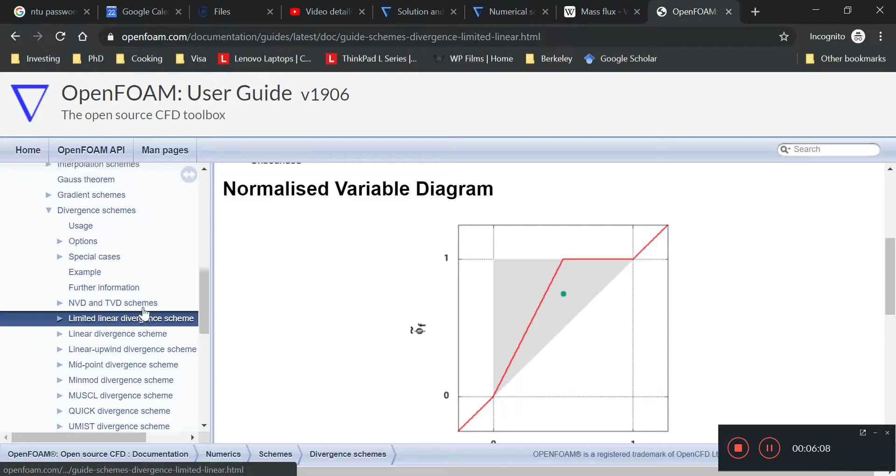Okay, so if we look at the upwind scheme, upwind divergence scheme, this is what the scheme looks like. Alright, so we can change all to some sort of a Gauss linear kind of scheme, which is what we want.

Okay, so this is Gauss linear. We'll go for Gauss linear for all of them. I'm gonna do linear for all of them. So Gauss linear.

Better make sure the syntax is right. So I'm going to fast forward this. Now basically I changed every one of the schemes to a Gauss linear scheme. Okay, this one I need to correct. Insert and press R, and WQ. Alright, so we can move on to the FV schemes, FV solution.

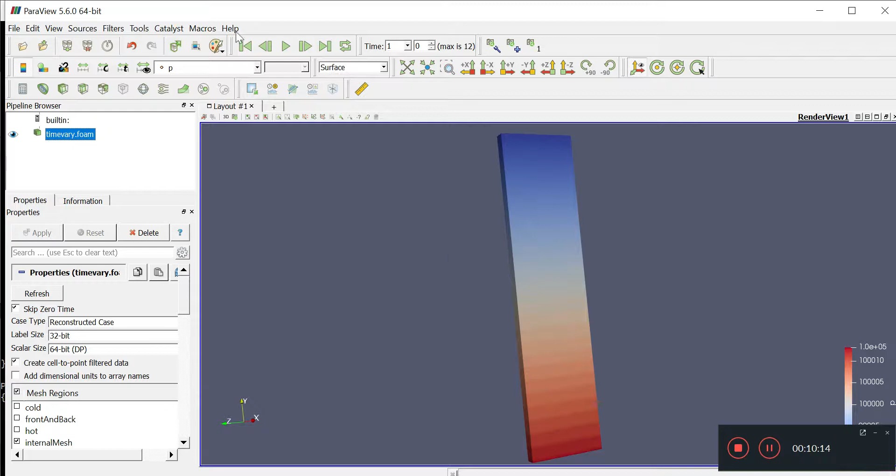Let's see whether this helps us with our bug. Okay, so we have a solid temperature profile coming out. So this is temperature at T equals 1, temperature at T equals 2, T equals 6. Again, nothing's changing for some reason. So that doesn't seem to solve the bug.

So let's take a look at the temperature inside. VI, okay, VI 1/T, and then we'll have this file. Again, it's the same bug here. Okay, so I'm gonna probably have to stop this simulation, and let's take a look at the bug log.

Okay, so trial solution results doesn't help calculate T. Okay, so write and quit, but let's see whether there's a U. Yeah, our velocity file is writing very nicely.

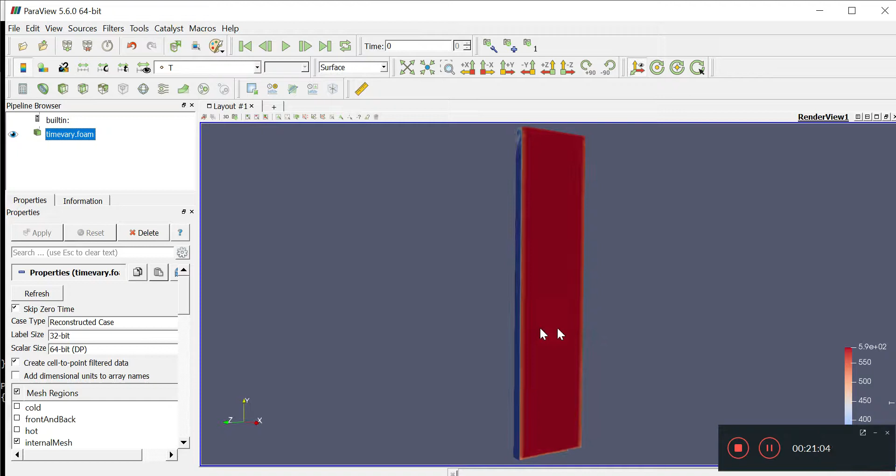Time vary.foam. Oh, it's a long 40 minutes of debugging. So yes, take a look at this. Now our temperature fields are calculating. We can see some convection currents being set up, and the temperature is about 600 degrees, which was different from before, which was fixed at 500 and something.

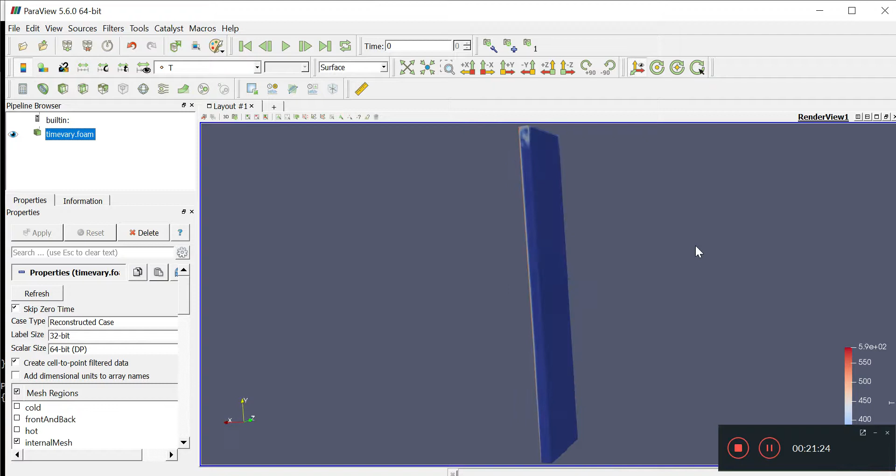But take a look at this, it's beautiful, there's a convection current. If there's a convection current, that means this thing is probably working correctly. So it's going up, it's swirling around, which is probably the effect that we want to see.

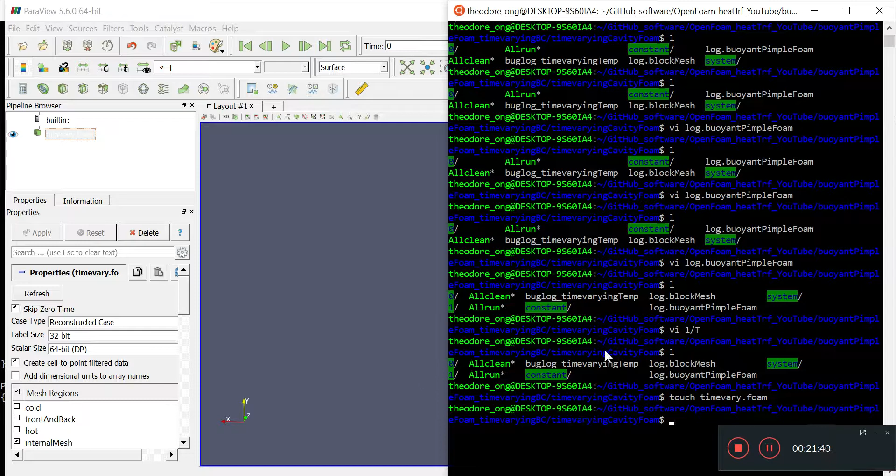So probably this simulation is going to take a few hours just to finish, judging from the first second taking about 10 minutes. So 10 times 100 seconds gives about 1,000 minutes, easily a few hours.

Let's see how long this takes. Okay, 1 second took about 800 seconds. So let's give a rough calculation: 800 divided by 60 is about 13 minutes for 1.2 seconds, or 10 minutes per second. So for 100 seconds, times 10 minutes divided by 60, it will take about 16 hours to finish the simulation.

So that's way too long for this video. However...

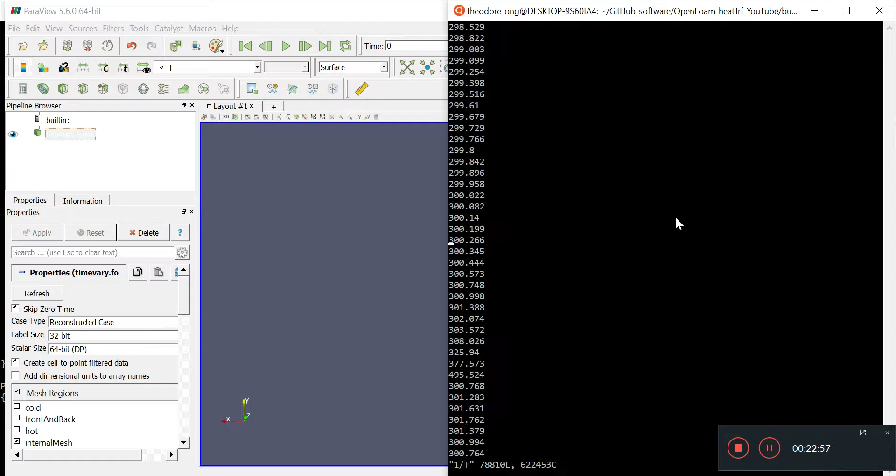Let's take a look again at our temperature fields, 1/T. Let's go all the way to the bottom. See? Now the value is uniform at 589.659. This is very different from what we started with.

So let's go to VI 0/T. Okay, so this is what we started with, the CSV file. And now the temperature CSV file, it's oscillating correctly, at least that's what it looks like, right?

1/T. Okay, so it's uniform at 589.659. So at least the CSV file is not the problem.

So let's go and update our bug log, and then we'll call it a day for this video. Alright, so VI bug log, time vary temp. So we delete it, it seems to work.

The combination of changing FV solution and FV schemes has allowed the simulation to work. So the time varying BC is not to blame.